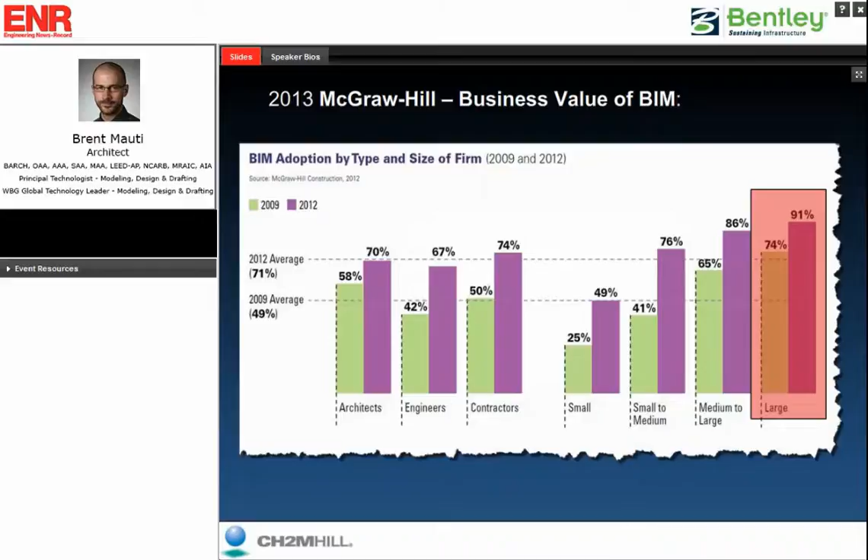Levels of BIM adoption, focusing just on North America, have steadily increased in the last 5 years. For us, CH2M Hill falls in the large bracket, and more companies are expressing themselves as being BIM-adopted companies with respect to use of the products and tools.

Focusing on the contractors and the owners, more and more of our supply chain, and especially our clients, are now requesting or mandating some type of BIM, whether it's BIM delivering us just models, or BIM where we want to leverage information for some type of downstream use. And that is continually growing and continually putting pressure on how we deliver.

Long-term benefits, I really like these: repeat business, reducing construction cost, reduced errors and omissions on documents in the short term, and reducing rework in the short term.

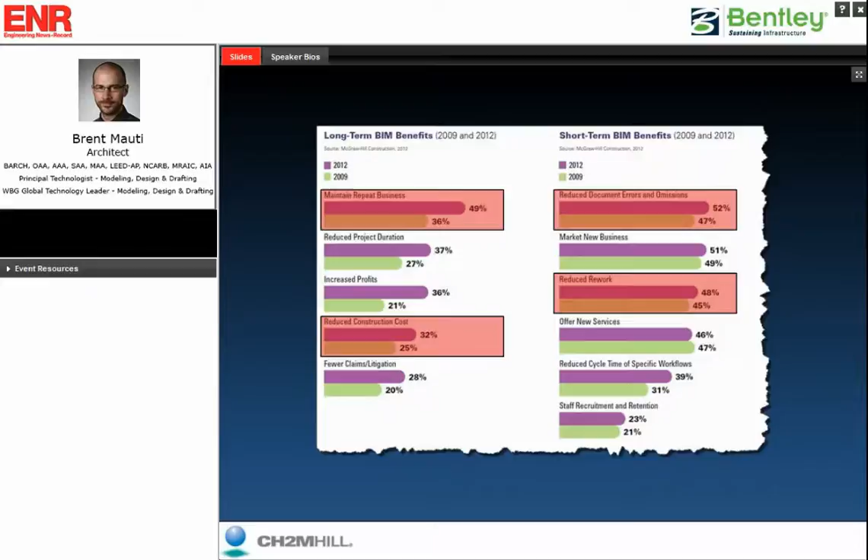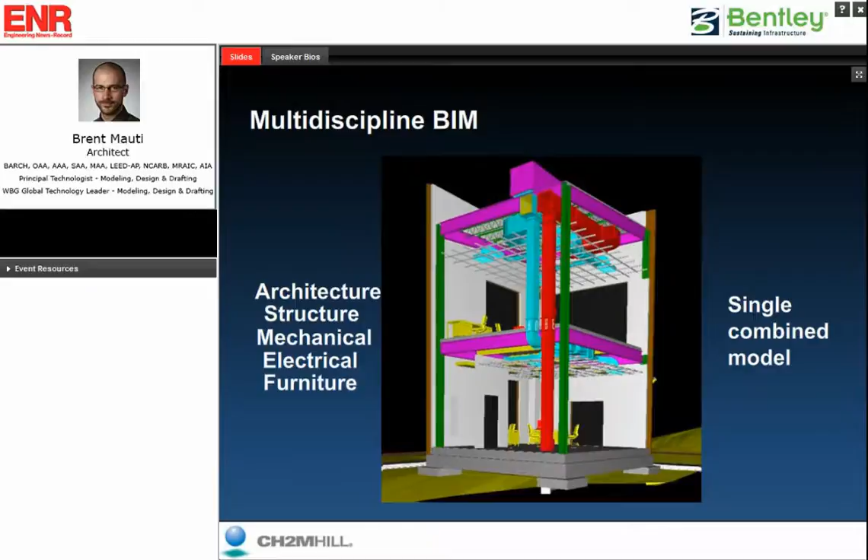So just laying that as a premise, CH2M Hill, as we apply BIM globally, BIM is really applied in a multidiscipline fashion. All of our design technologies are working and functioning in the same virtual space, developing models and information simultaneously. We have this quote, single combined model, which could be one central repository, a collection of federated models, etc. But BIM in a nutshell is geometry plus data put together.

Data can vary depending on the component, depending on the output, depending on the data needs. But when we deploy, as long as the components we model are known, as long as they know what they are, then everything is fundamentally BIM.

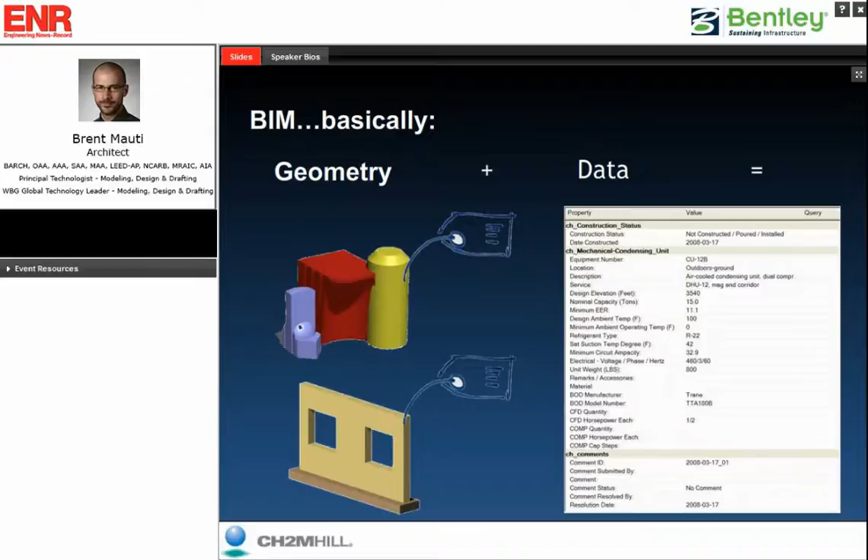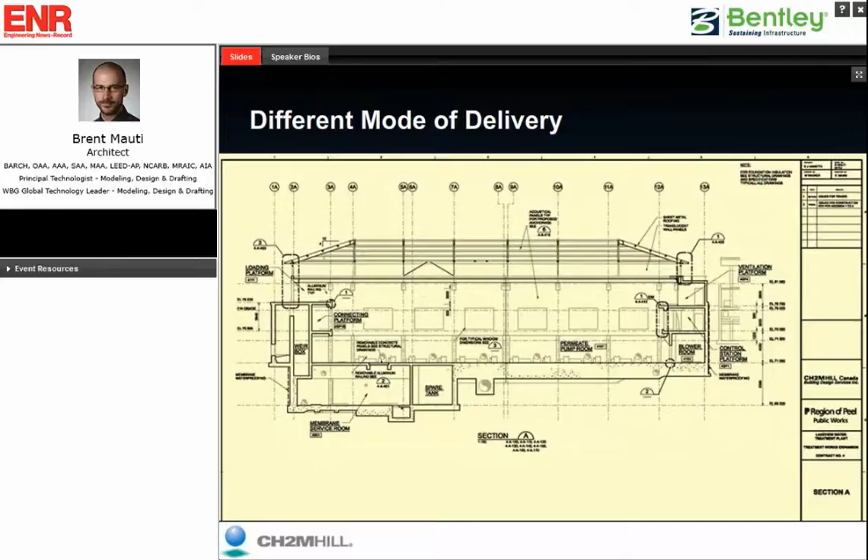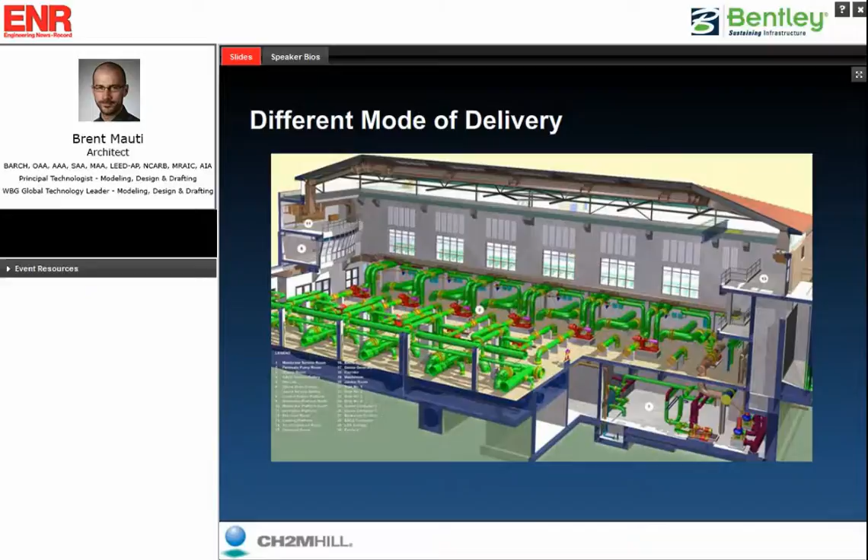And then we've migrated from 2D. When I initially started, BIM was in its infancy within the firm, but it was still being done on select projects. This was the mode of delivery, and this became this. This was one of my projects 10 years ago, and you can see the difference, the amount of information, the robustness of the visual acuity of what you're trying to portray versus that section.

We have several examples now where we can take our models that we've developed, go off to site, and do a compare and contrast. And I'm always amazed when I see the finished product being very close to what was within those design models. If the design models continue through construction, those as-built BIM models are pretty spot on.

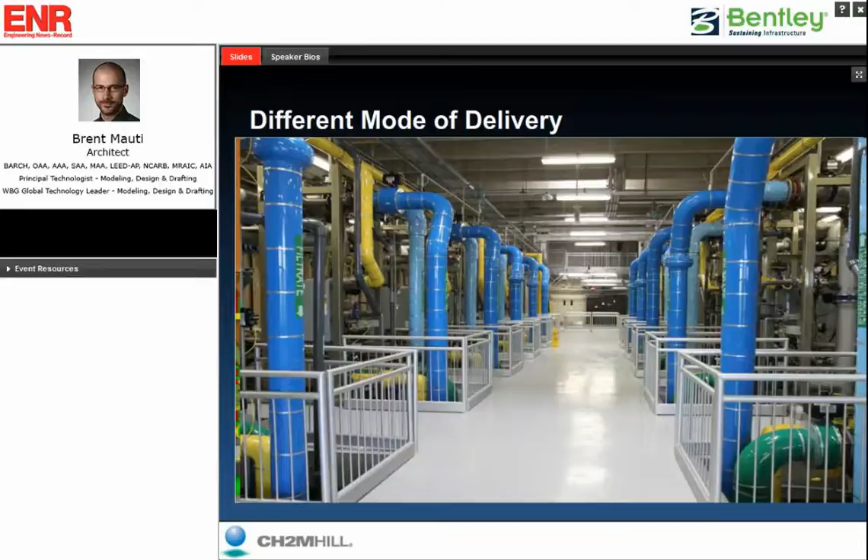The graph is the MacLeamy curve, seen in every type of BIM documentation, from conceptual through to construction. You can change things far easier in concept than during construction, and it's far more expensive to change during construction than during concept.

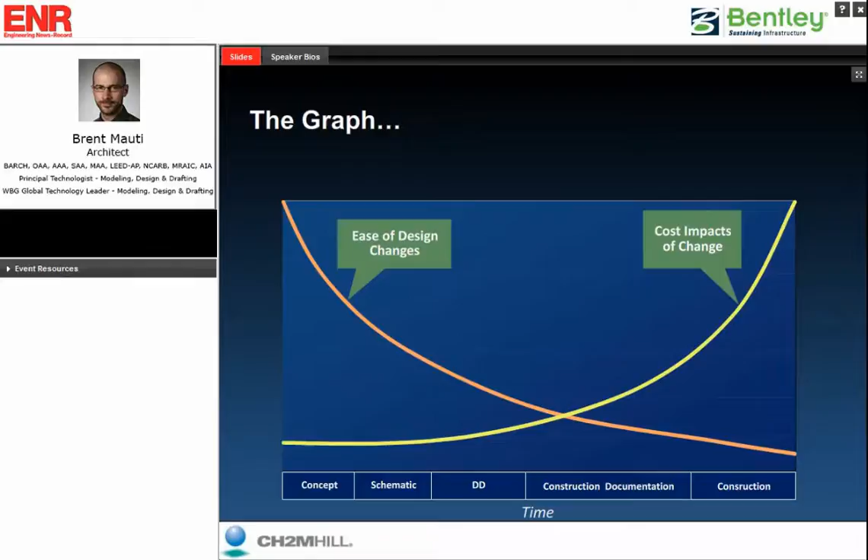We want to take that effort and push it so that the decisions made are robust and accurate as early in the project as possible. CH2M Hill has gone through a lot of efforts to define workflows, procedures, change management, and design checklists in order to help us be more diligent applying this conceptually.

It's always difficult not to want to go at the last minute and make those minor changes, wanting to erase stuff like we used to do on paper. All change can still be done, but it all has to be done in a coordinated manner.

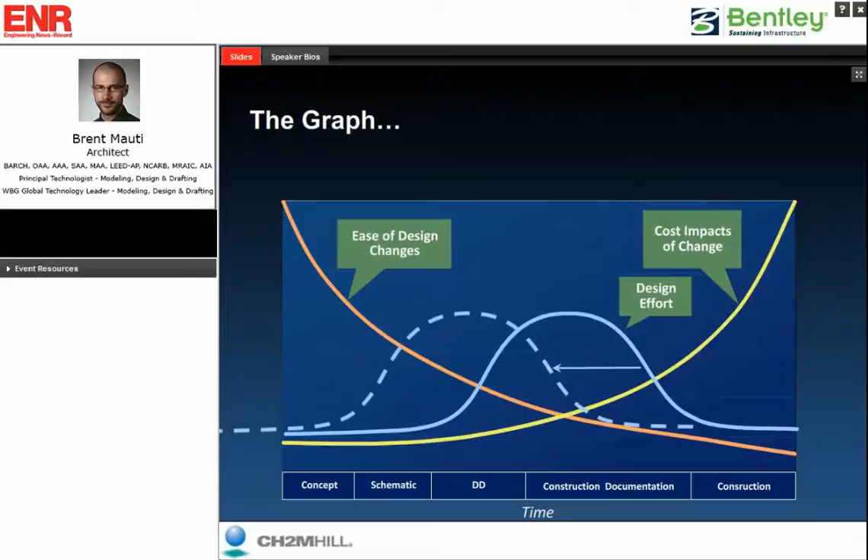So when I present BIM, I try to focus on what can you do and why. The model is the hub, the heart of BIM. Everything happens there, it's the single source of truth.

We use the Penn State BIM execution plan as a template for our project-specific execution plans. I like that plan because it defines the BIM goals. You select the goal you need to achieve on the project, either to achieve internal efficiencies, to meet client needs, or to better deliver, and you define your goals.

So when you look around the wheel of BIM, we have the ability to plug our model into analytical software, either provided by Bentley, if we're doing Bentley-based BIM, or provided by third-party vendors.

We visualize, so as simple as a print screen pasted in an email sent off to a stakeholder, here's your model, straight up to photorealistic visualizations and animations that take on setup time, production time, etc.

We are working on linkages to our specifications now through a tool called SpecWave, where we're actually able to potentially harness BIM information and take a first cut at editing specs based on the information harnessed from the model.

Design review and drawings and schedules are the fundamentals. That middle vertical stream is the de facto for CH2M Hill projects: we make a model, we walk through it and review it, and we make drawings and schedules.

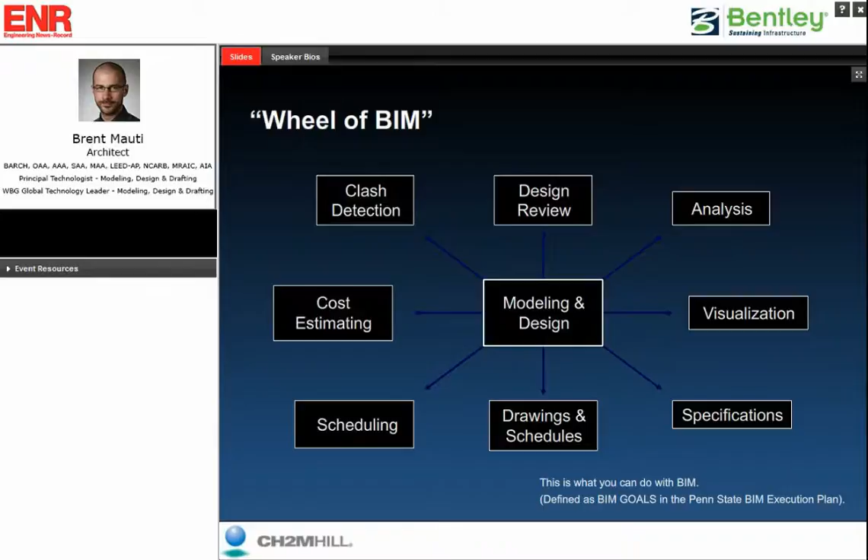To further extend it, I only have a couple here: fabrication and procurement specifically. Depending on what type of data is defined as important and carried through beyond the design lifecycle, we could take components like steel beams and send them to a fabricator to facilitate fabrication in their factory based on the data from the BIM.

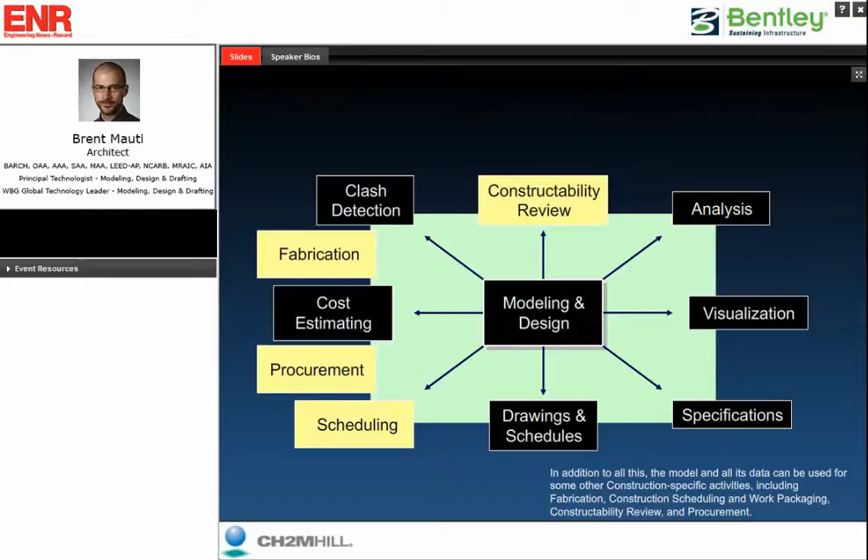We could take valves and pipes, for example, on a treatment plant and procure them en masse across multiple projects based on the data housed within. We recently have been tweaking this slide internally. You could have asset management, health and safety plans, etc. So there's a lot that can be done.

Now, we talk a lot about degrees of BIM internally. So do you have to do full BIM on every single project or not?

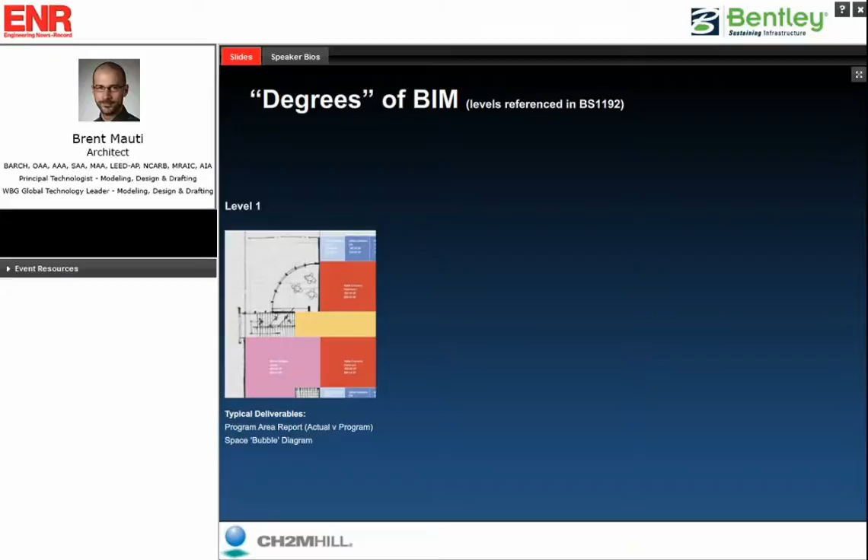We started with a level 1, which we describe internally as design-type charrettes, layout block diagrams using a tool like EcoSim. Those layouts carry intelligent room data information and can be pulled into a schedule and analyzed, and eventually can be automated into a level 2 type where you have one or more disciplines functioning in an intelligent modeling environment.

We have some projects where we have external subs who may do MEP in 2D, while we do architectural and structural in 3D, and we kind of make them jive.

The next level would be a multidiscipline full BIM model, but with limited information, so we're doing it really just for design review and drawings and schedules. Then there's the level that I call super BIM. Internally, we've been calling these levels 1, 2, 3, 4.

Recently, with the BS 1192 standard coming out of the UK, they called it level 0, 1, 2, 3 - similar type definitions. We're doing a lot of work in our UK offices to ensure we're able to satisfy these BS 1192 requirements and reach what they call a common BIM level 2 deployment, which in this vernacular would be what I'm calling level 3 full multidiscipline BIM. Now that's just focusing on design.

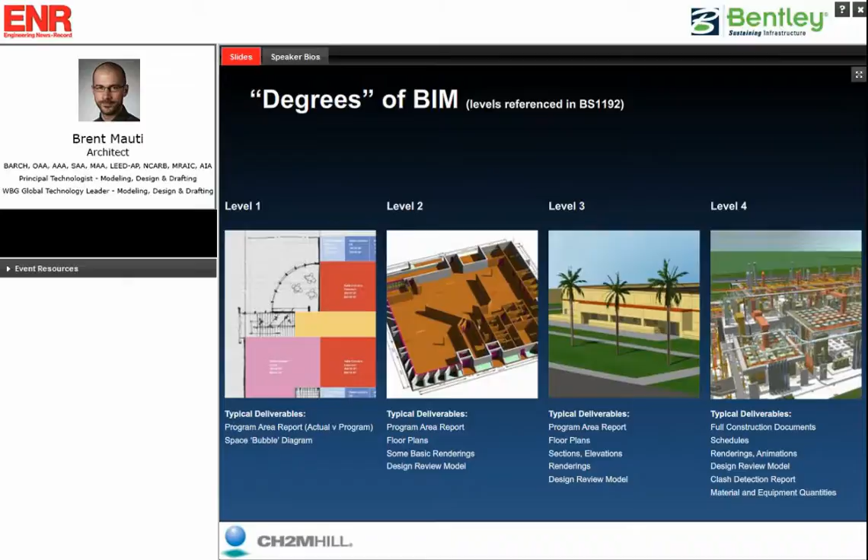The model continues into procurement and construction, and we can create work packages, construction phasing, staging payment plans, layouts, as-built models, etc. Holistically, it can go into operation and maintenance, so that same model can grow with respect to how much information is contained within it, leveraging owner-operator review, health and safety analysis, evacuation planning, and linkages to facility management systems.

And then beyond operations, if a building is to be decommissioned, we could know how much material needs to be recycled or disposed of. Or if a building is to be repurposed, we then have an as-built BIM model and an as-operated BIM model in order to plan the future life of that project.

Now I said look at it holistically because in reality, some components won't require anything additional than what's added to the model during design. For example, you could have a piece of furniture placed in the model so you can get a count of cubicles in an office building. When it's constructed, the information from the design model might be all that's required in construction.

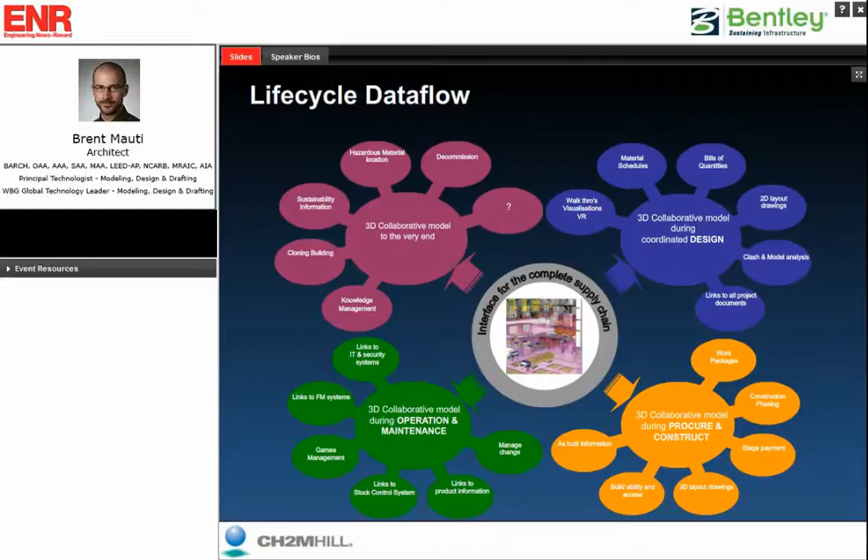Whereas other items, like the finish on the floor, might not carry as much prominence, and thus the data modeled during design might suffice. So define your asset of importance and track it throughout the lifecycle of the project.

We then looked at, well, how do we build these teams? CH2M Hill is a dispersed company with users all over the globe. Now some BIM software focus on what's called a centralized database. That's doable, but this graphic is trying to depict that depending on where you are in the world, you'll have a different connection to that centralized database, and thus the perception might be, well, BIM doesn't work because it takes forever to move a component.

So we take the federated approach where it's like sending puzzle pieces across the globe. We each own and author our specific federated portion of the model, and we have a glue that allows us to share these components across. There are times when we have to utilize both a centralized database and a set of federated models simultaneously, and we plan that through our BIM execution plan. I'll come back to the glue that pulls it all together in just a moment.

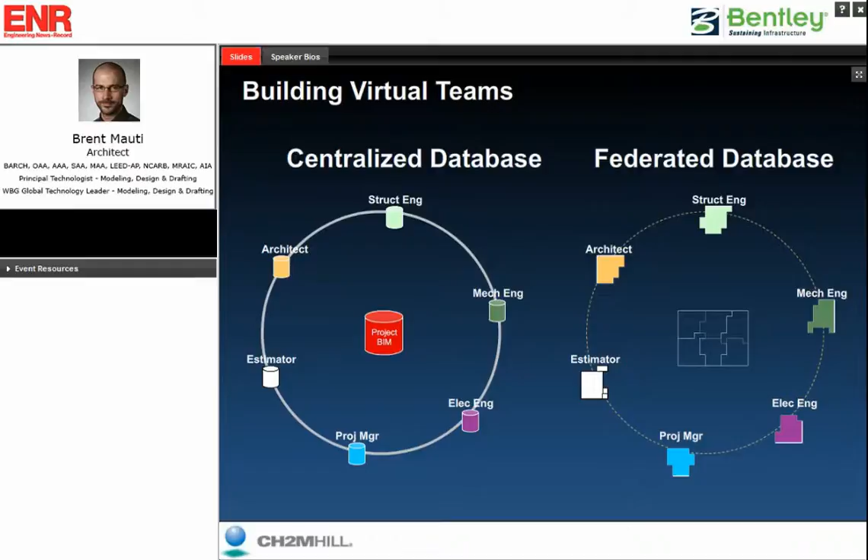So then finally, when we look at metadata management, we start to look at, well, BIM is divided, in our view, into three focus areas: building, civil, and plant. So what are we modeling - is it a building component, a civil, or a plant component? What is it? What tool am I going to be using?

So how am I modeling it? What type of space does it take up? If I specify three types of vendors, are there three different potential sizes? How do I account for that? Depending on whether I'm building civil or plant, I will select a specific tool, and that tool will drive certain required data to be placed in the model.

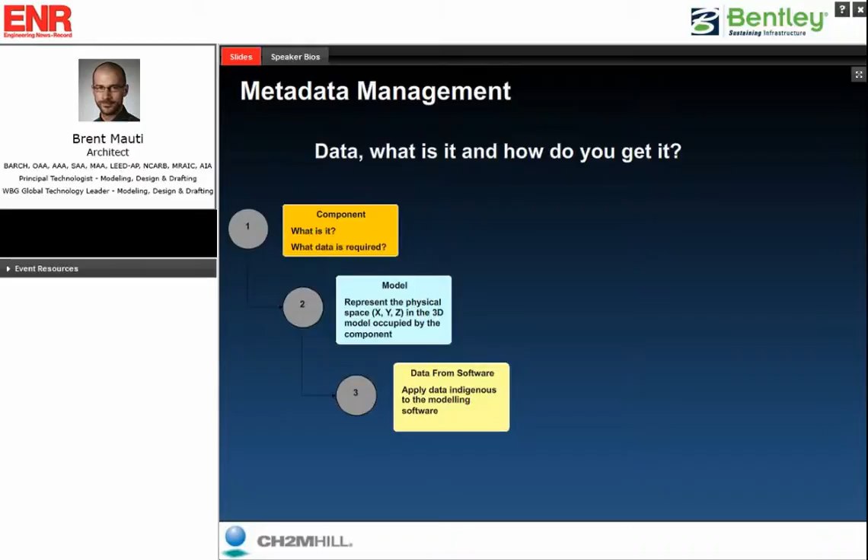So using AECOsim Building Designer, if I want to place a wall, first I have to say place wall, so the tool knows it's a wall. Then I have to enter some particulars about the wall before I can even place it. So I'm already forced to fill out information. And then what type of unique information or unique identifiers are required?

So if I'm doing a door, being an architect, I'm very familiar with that. I place the door - is the door fire rated? I'm going to give it a door number. What type of hardware - am I using a hardware type, or hardware specific, like closers, hinges, locks, etc.? I can start to build that information while I'm selecting and placing the component.

So in the world of Bentley, you list your type of component, and depending on what you're modeling, it will drive us to a specific BIM authoring software.

We select the representation of it, and I always like to say, don't dwell on the frivolous. Over the years when we try to do design review, if you're modeling the door hinge or the buttons on a control panel, it bogs down the model with frivolous information that doesn't help the depiction of the tool, the procurement of the component, or anything beyond.

What data comes from the software? Parts and families are in the building, we've got flow streams, service identifications on the plant side, etc. What do you have to place, and what uniqueness can you add in lieu of that? You ask the question for each and every component as you're modeling, and once our users became familiar with that, it became second nature. They know that if they're going to model a column, there's components and metadata to select in order to place the column in the model.

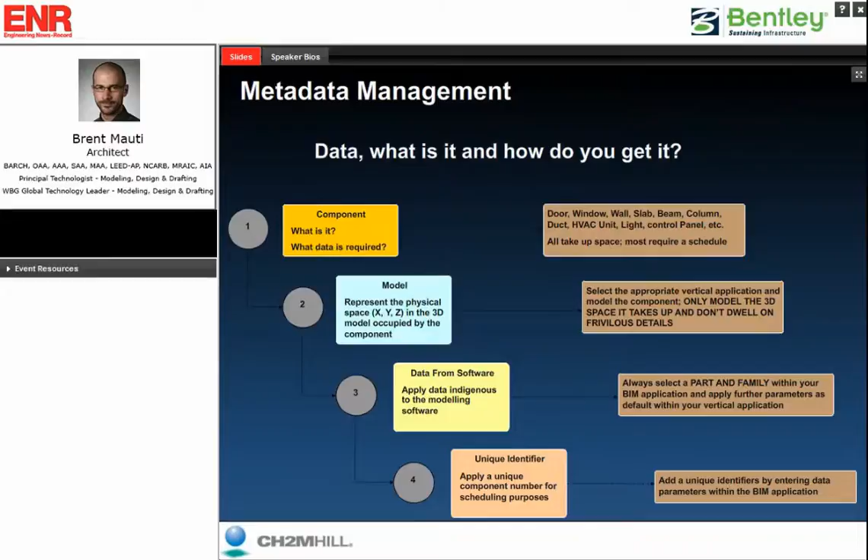So we'll talk about the glue that connects us together. ProjectWise is our document management and content management system. It enables us to create content in the BIM authoring software. We have to manage the content, deploy it globally, deliver to the right audience in the right form, and ensure it is correct, accurate, and current. We want to preserve what we've built so we can reuse and quality check, and as standards and content change over time, we're able to revisit, re-review, re-quality check, and continue to reuse, all while collaborating so we can share and work share across the globe, leveraging our expertise anywhere.

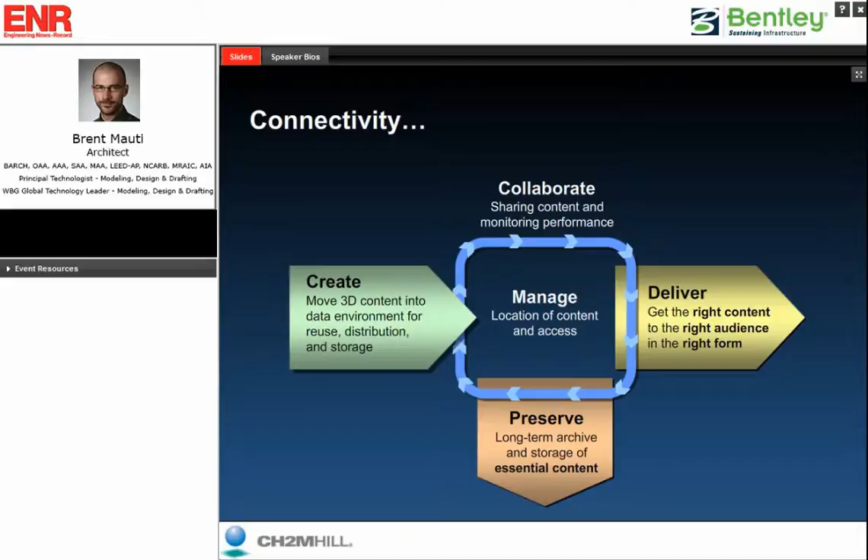For those who haven't seen ProjectWise, we've got full connectivity via a desktop application, and there's also a SharePoint application with a lighter version, a lighter ability to connect. In SharePoint, we tell our stakeholders that you can access this environment to review static production, so PDFs, iModels, etc. But to author content, you want to use the real ProjectWise environment, and we'll talk a bit about that here.

So if anybody's thinking, well what exactly is ProjectWise, why are you guys using it? I like describing it as just a bunch of servers scattered across the globe. At CH2M Hill, our architecture of the system has a corporate data center housed for us within Denver and London, and from that corporate data center internally we cache to local offices. We have a data center server, a bunch of servers in a local office, information moves to and from those offices. Then through the gateway server, we're able to connect external entities who have their own ProjectWise infrastructure, or external entities just connecting via laptop.

The biggest benefit about ProjectWise is it brings us this delta file transfer. As we're sharing information all across the globe, we send the entire file the first time and then just the changes the next time. So our corporate data center is like a puppet master, and all the other pieces around are like puppets, pulling the strings, ensuring synchronization all across the globe and ensuring that the most accurate bits and bytes have been transferred to and from every single user that touches a portion of a project.

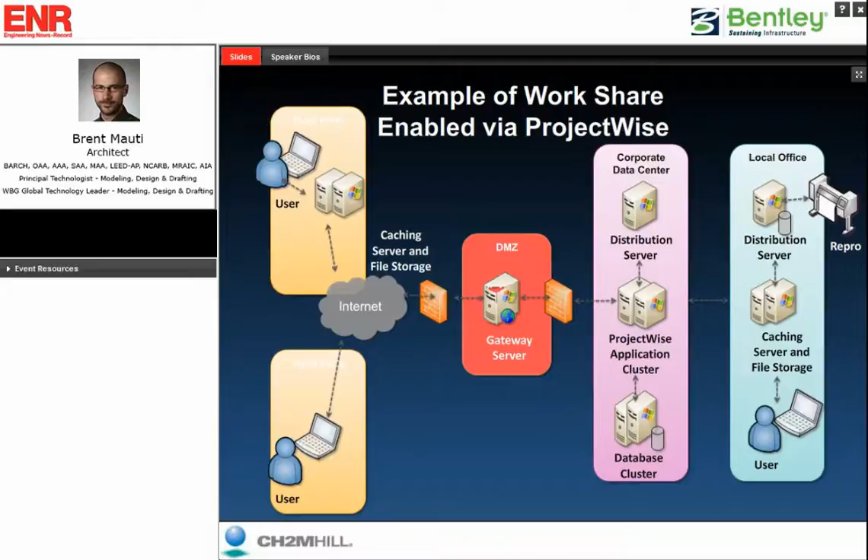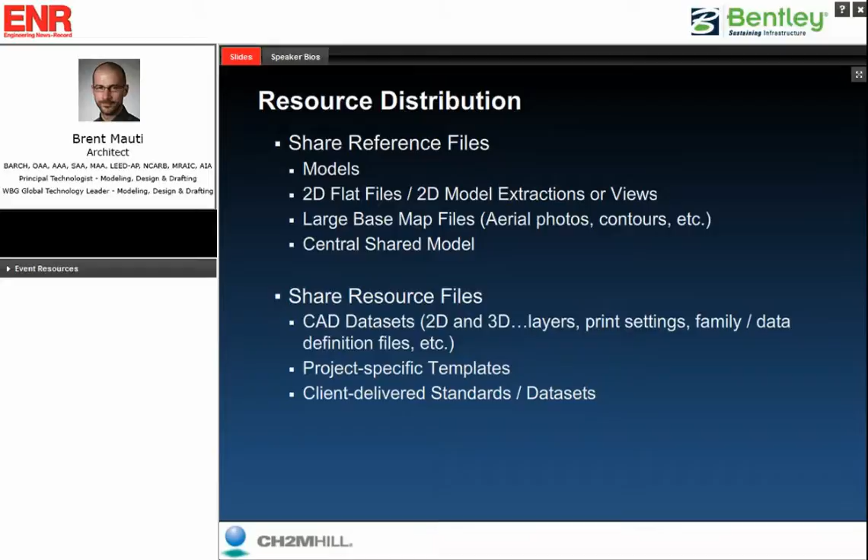With ProjectWise, we have a very heavy focus on resource distribution. Using Delta file transfer and caching, it will grab all the models, flat files, base map files, and shared central models for Revit, locally cache that content on my machine, bits and bytes. We also share what we call our resource files or data sets - a robust CAD data set for AutoCAD and MicroStation to bring complete interoperability across platforms, plus data sets for building, civil, and plant that we globally deploy using a tool called ProjectWise Resource Manager, which we developed internally as an add-on to ProjectWise.

So this workflow: access the collaboration system being ProjectWise, check out a file, locally cache your references and/or update them. Then for us, this tool kicks in - the first time you check out a file, we throw you some compressed content, maybe up to 10 or 15 zip or cab files containing the data sets for platform, building, civil, and plant. Open your content, author it, and check it back in.

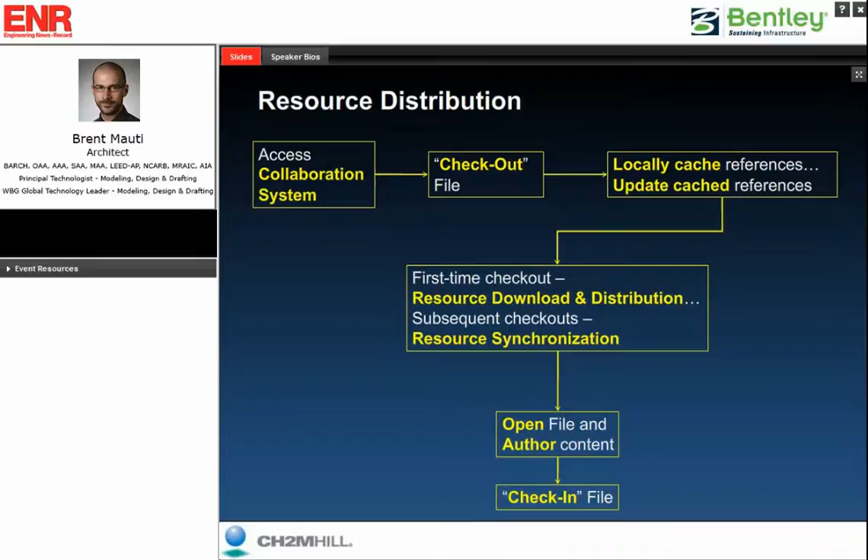The way that works is we have this synchronization perpetually occurring, still leveraging Delta file transfer, but we have a set of compressed resources - for OpenPlant, PlantSpace, base MicroStation, base AutoCAD, AECOsim, the various Bentley building versions, etc. When a user accesses the system, just those compressed files get locally cached to the user's system, and then once cached, it gets deployed.

So when we go through this process, the deployment of the resource using AECOsim, for example, our data set has about 4,000 files. So instead of locally caching 4,000 files out of ProjectWise every time I open and update a file, it'll locally cache my one AECOsim compressed resource. When it verifies I have the most current resource, then I'm good. If I need an update, it will bring me the change and then locally deploy it to my machine.

Our workspaces and project configuration files will all reference these deployed locations, and ProjectWise Resource Manager ensures the content expanded to our C drives is the most current synchronized content with what's being deployed from ProjectWise. Also, since it is C drive based, we have complete flexibility to extend this to anybody outside of the CH2M Hill environment because there is no dependency on our networks or servers.

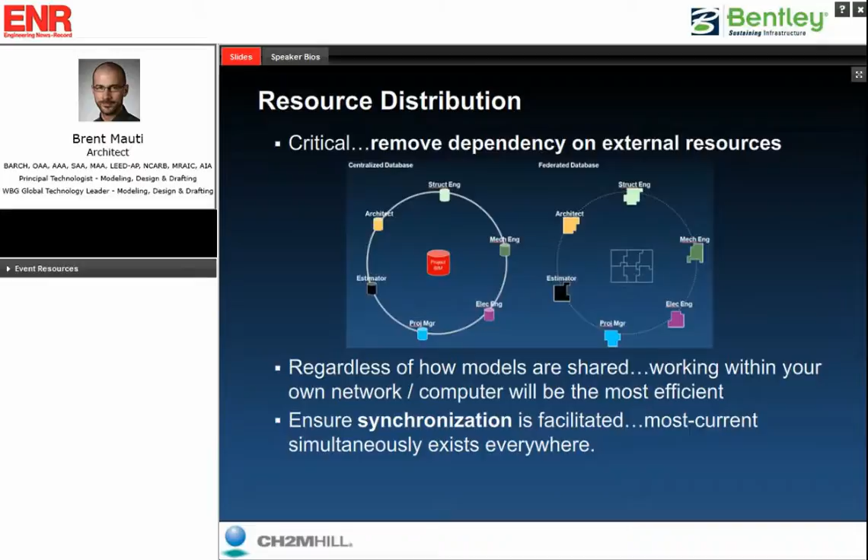So that's critical - moving the dependency away from external resources. We're sharing models, whether it's the centralized database or the federated approach. The more we can enable users to open content, unplug their system and work, that means they're working locally on their C drive and connecting and moving content to and from ProjectWise. Synchronization is facilitated so the most current version is always on the machine when content is launched, prior to someone being disconnected. So my example there is I'll go on a plane, and I can work on my model because I pulled the content down from ProjectWise before getting on the plane.

So we want to remove the need for connection to our networks or various secured cloud services by allowing access through our cloud, which is our ProjectWise infrastructure - grab the content, work, and then send it back. This enables us to work with externals, not only for Bentley data sets, but also when we're converting to AutoCAD and have to deploy AutoCAD profiles. This synchronization we've enabled through ProjectWise has allowed us to utilize one configuration, which is C drive based, thus extendable to anybody sitting across the globe.

So I'm going to talk a bit about the BIM tools now, and I have a couple diagrams that I'll walk through here, to show kind of the whole picture together. So we'll start again with the glue - ProjectWise is our hub. As we develop these BIM solutions, we look to develop them using ProjectWise as our foundation to enable collaboration.

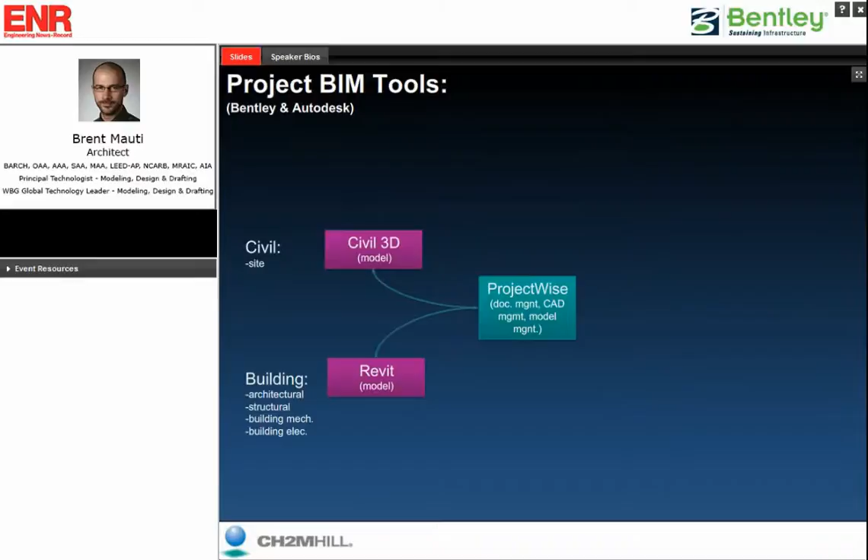From an Autodesk standpoint, we've had projects where Civil 3D is a requirement, as well as Revit, with AutoCAD as our deliverable and MicroStation on the back end.

What we're having here is Revit using the iModel plugin can get us an i.dgn file in ProjectWise to use in our Bentley-based plant delivery.

ProjectWise has enabled us to place the Civil 3D data shortcuts from Civil 3D into ProjectWise as well. So ProjectWise is now managing the central model of Revit, the data shortcut projects of Civil 3D, and providing a medium to get Autodesk BIM-authored content into the world of Bentley.

But just to make things a little more complicated, we have our deliverables. From the AutoCAD perspective, we can grow our Bentley plant solution because that's where we have our most robustness. But we have Autodesk projects now asking, can you use Intergraph's CADWorx, or new Plant 3D, Revit MEP? And I didn't even put in Bentley AutoPlant. So the AutoCAD-based solutions from a plant perspective, there's many of them.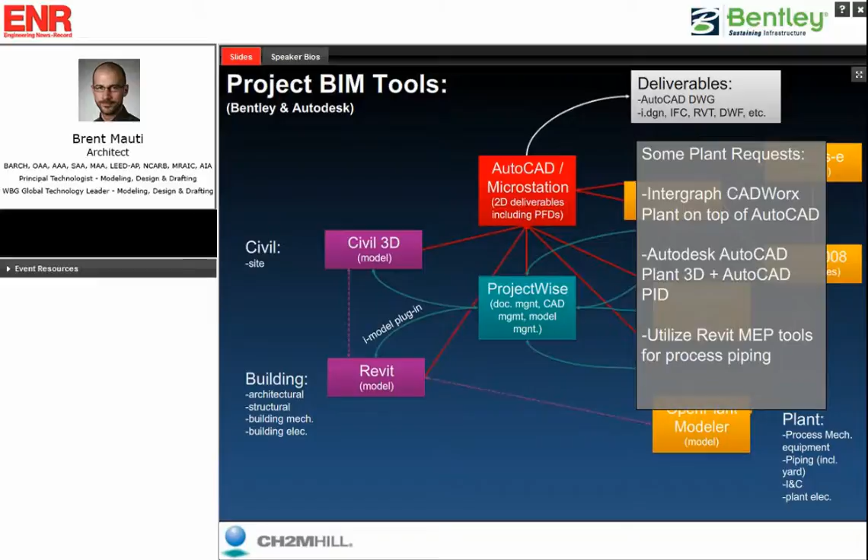ProjectWise has allowed us to say, let's take whichever one we have to utilize, but we can still manage content and build teams through the ProjectWise interface. And then finally, looking at Bentley, if I have this whole Bentley solution I described 3 slides ago, we then have others.

So we have projects where SolidWorks comes into play. A vendor or supplier says, we only build our unique mechanical component using SolidWorks, or Autodesk Inventor, AutoCAD Inventor. These are unique tools that don't integrate with ProjectWise, but we want to manage the authorship of the content, especially version control, and track it specifically to meet the UK's BS 1192.

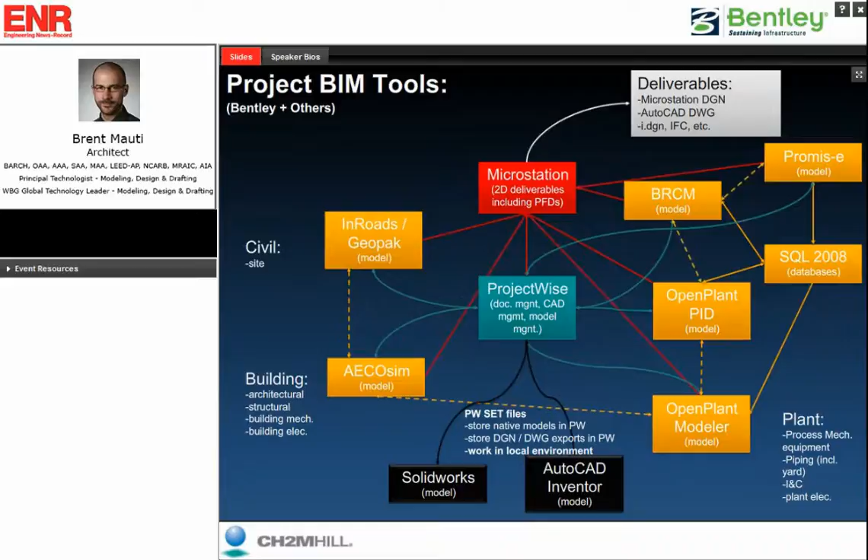So to do that, ProjectWise has the ability to make link set files. What we'll do is store the native content in ProjectWise, use the link set to extract the collection or composition of components and files required to utilize those types of tools, work offline to author them, and then send that set file back into ProjectWise. This lets us maintain interoperability and authorship of the content, sharing the outputs from those tools across the rest of our environment.

So ProjectWise being the glue for all those various BIM tools, internally at CH2M Hill we've looked and said, well, we've got to go from large to small offices and deploy this content. ProjectWise let us look at this and say, we have delivery centers, large centers, small centers, project offices, etc. They might vary from 1 person to 10 people to 200 people to 500 people. It doesn't matter, ProjectWise lets us enable work share from any one of these places.

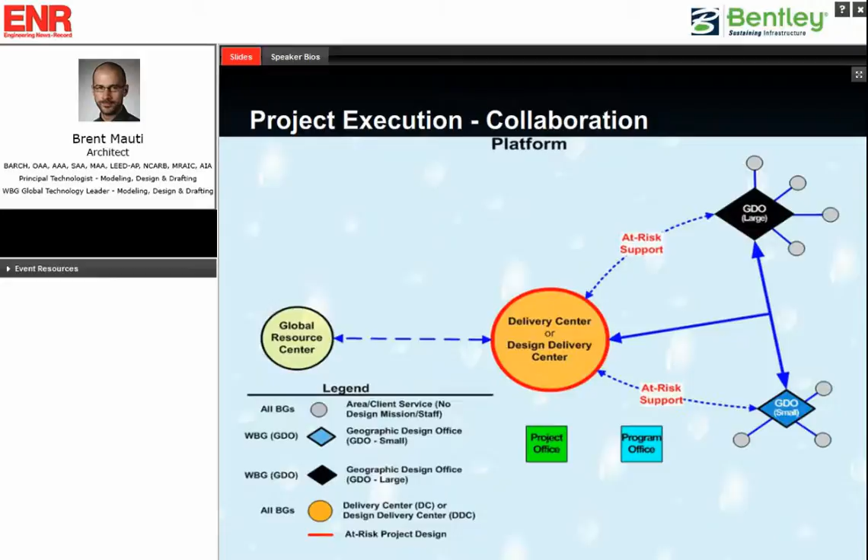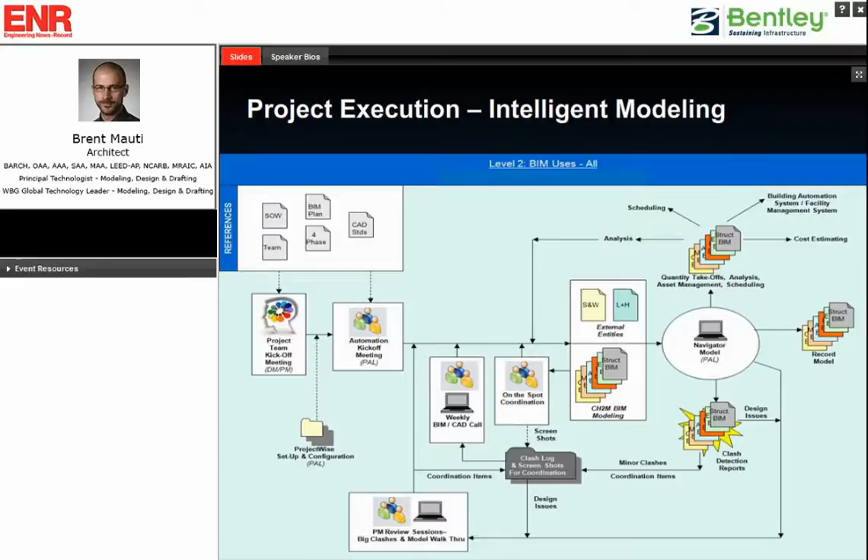So that all happens, then we develop this CH2M Hill model here. Whatever the tool, the collection of BIM authoring tools, the content gets authored, gets modeled, gets reviewed by what we call a PAL, Project Automation Lead. This is showing Navigator, it could be Navisworks, could be something else. We review, we clash detect, we go through this cycle to and from the team, back into the models, back into the review, continue that circle until finally we're at a point of delivery, and we can deliver quantities, takeoffs, drawings, schedules, stuff to asset management, etc. Or we can finally have our as-built, our record, our as-operated, etc. So we go through that entire process for each project.

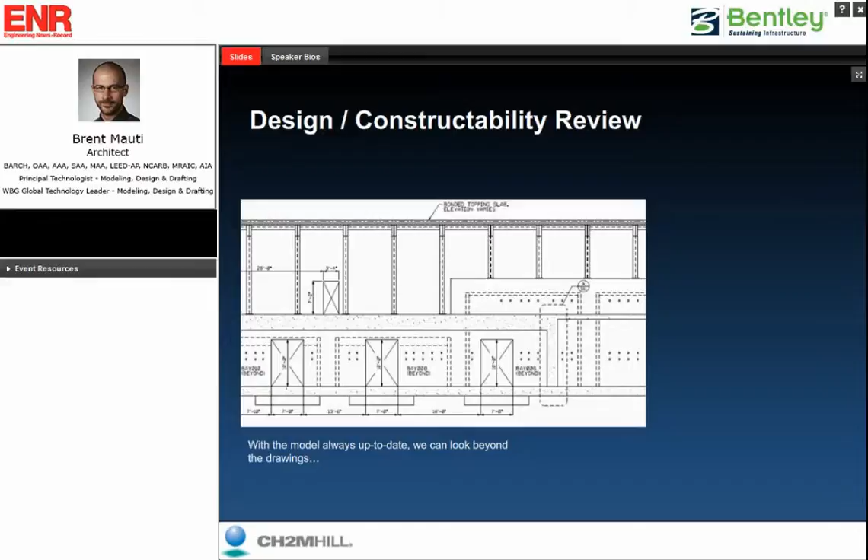So very quickly, design constructability review, some of the benefits BIM brings us. We're able to look at this and say, instead of trying to interpret that drawing, we'll look at the space, we will collect the models, look at the space as a whole, understand how the components go together, can it be built, is that the right stage to build content, analyze that accordingly.

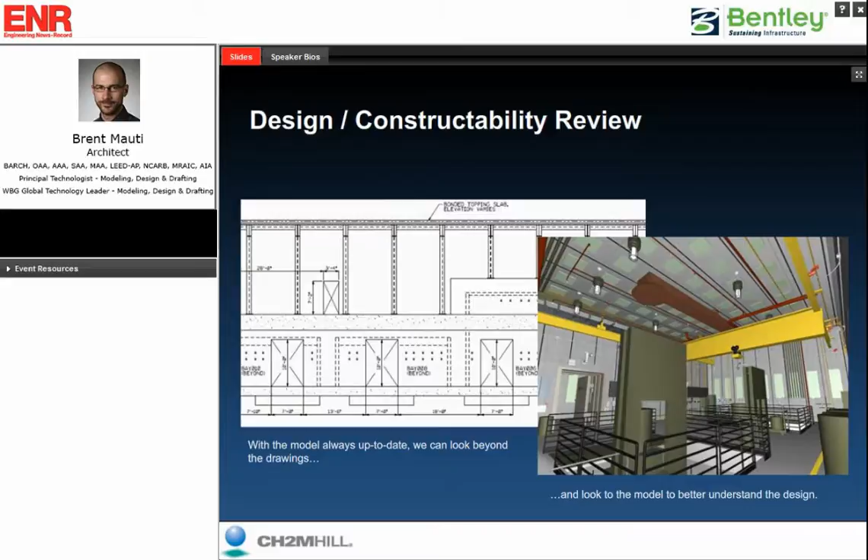We can clash detect, so Navigator is awesome at this, right? Press a couple buttons, reference A to reference B, level X to level Y, process, a couple seconds later it starts showing me all of these clashes—where are things touching other things. There's some pretty good suppression rules, and you can get a good report from what's new, what's been addressed, what's still existing, and you can mitigate this. This Excel report, you can pass that around to design managers, but the interactive reporting, to get a team on a quick live meet, cycle through these clashes and say, look, some of these are maybe okay, but you know what, beam going through door, you got to fix that, right?

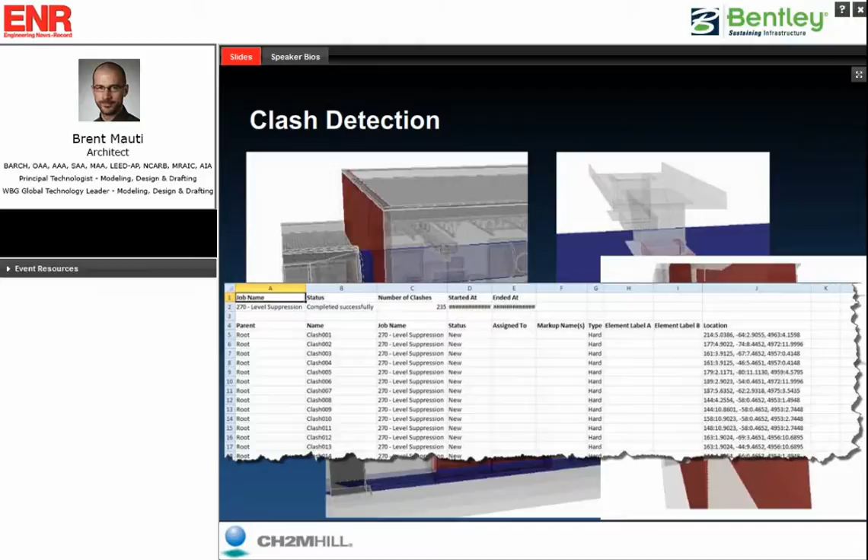That's just not acceptable. We can simulate construction, so we have a project where we've tried to schedule the content.

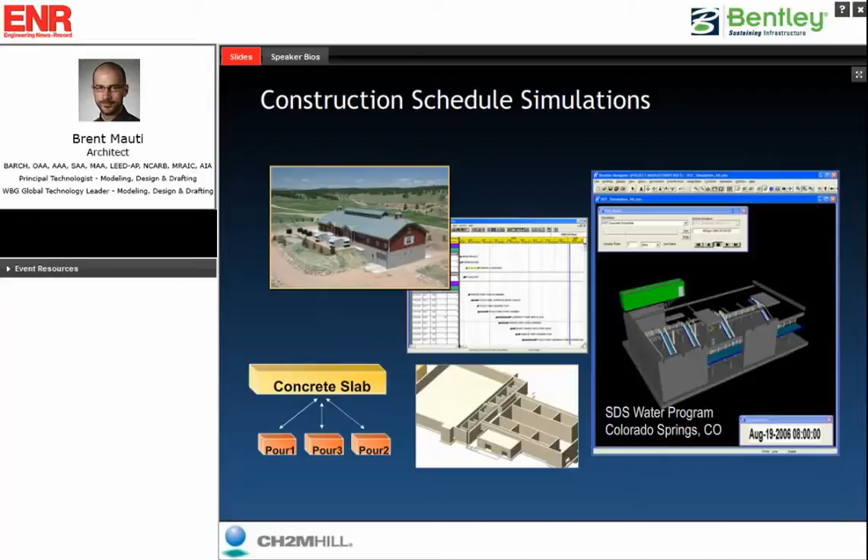When we're looking to do schedule simulations, what we stress with our modelers is be cognizant of how you model, or else we cannot schedule. This little diagram, the concrete slab into the 3 pours, I like showing on these presentations because it gets that message across. If I want to show the concrete's going to show up in 3 pours, I can't model it as one component. Another example, we have a 5-story building. You can't model the steel column 5 stories high - it can never get to site, and that's not how it'll be built. So as long as modelers are thinking model as it should be constructed, take educated assumptions during design, refine during construction, you've got something pretty robust.

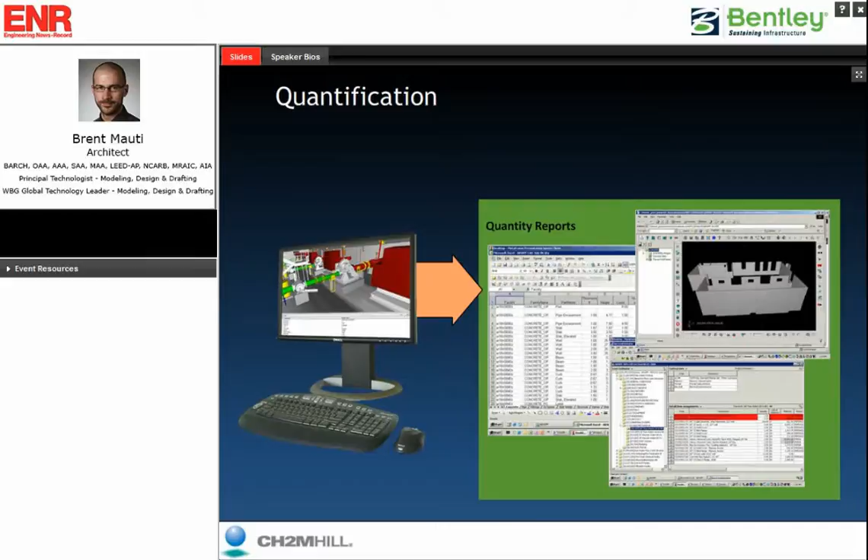Quantification, a couple of clicks of a button and we get reports, whether it's in the building, civil, or plant tools. I'll cycle through this, but this is an example of a concrete report from our building model. We have a robust list of parts and families that our estimators want us to divide the content, so we've set data group catalogs based on what were initially just parts. Hit a couple buttons and the content can be estimated for us.

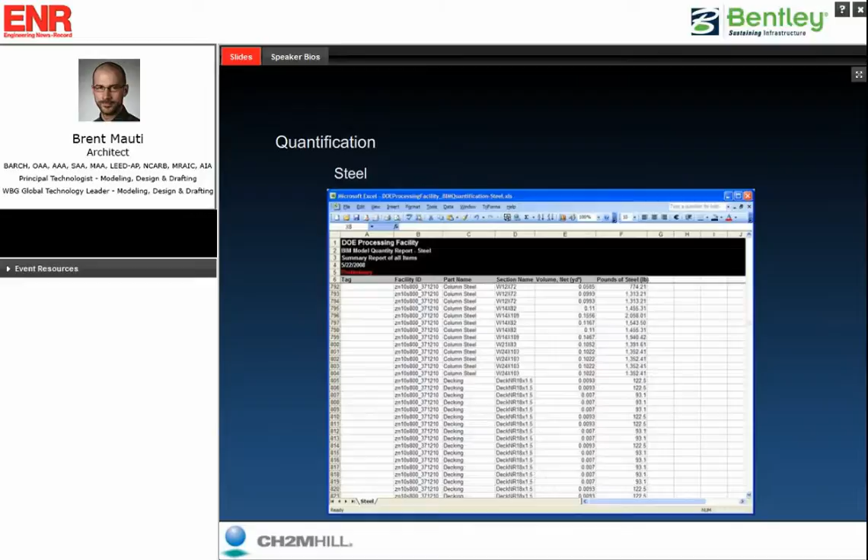Same with the steel, this is just going through various sets. You can see all the types of steel that exist within any given project or model. We can get full reports of those, we can isolate them by steel type, or just show everything in its entirety.

Energy analysis, we've attempted to use AECOsim Energy Simulator to pull a GBXML export of our building model into Simulator and run some simulations. We also use some third party tools where we try to pull content out. This is more of a work in progress for energy.

Structural, we've been playing with some AECOsim to STAAD/RAM using the ISM as the convert medium. So we have some engineers that gravitate to that. Others, sometimes that's a bit of a barrier, and they'll just say, you do your model, we'll do our analysis, we'll make sure the two jive.

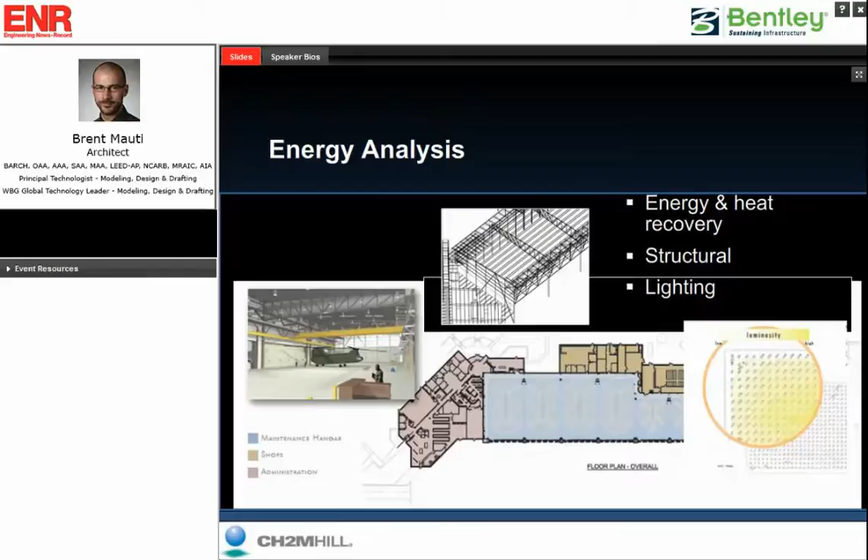In closing, I want to talk a little bit about leveraging data for the last couple of slides, and then we'll open up to questions. So, as I said, the quantity...

It's not just quantification, but now with AECOsim, this was kind of revolutionary for us. AECOsim brings the ability to quantify absolutely anything, and that's what's huge for us - everything has data group as a backbone. Thus, I place it in the model and I can quantify it, complete with areas too. So areas net, so I can do the form work, and areas gross, and then also net, so I can do the finishes if there's holes cut within the slabs.

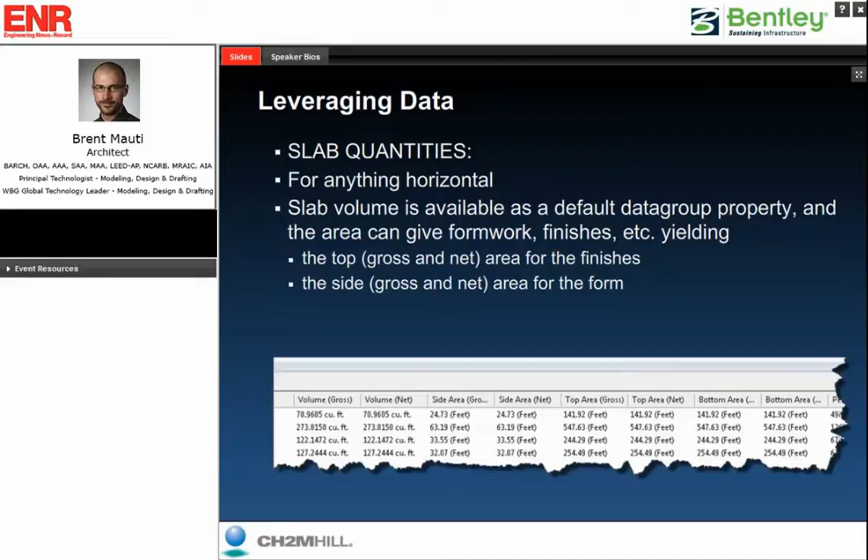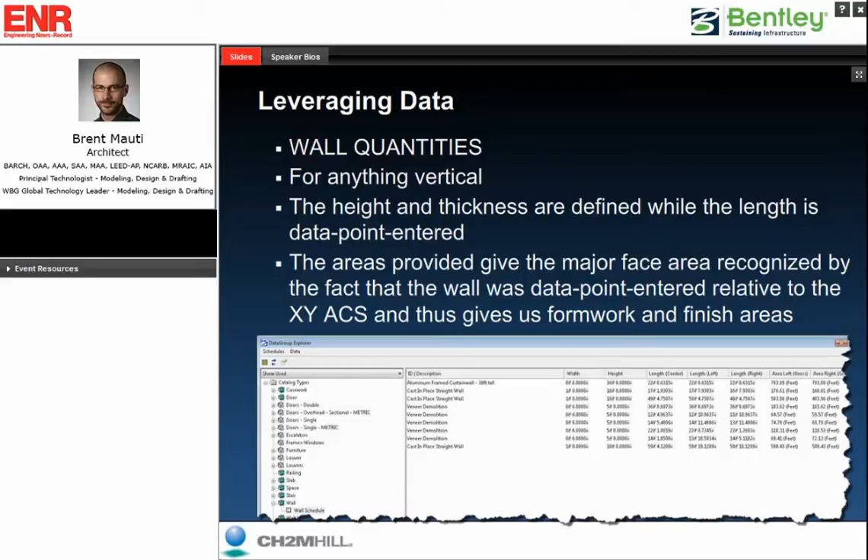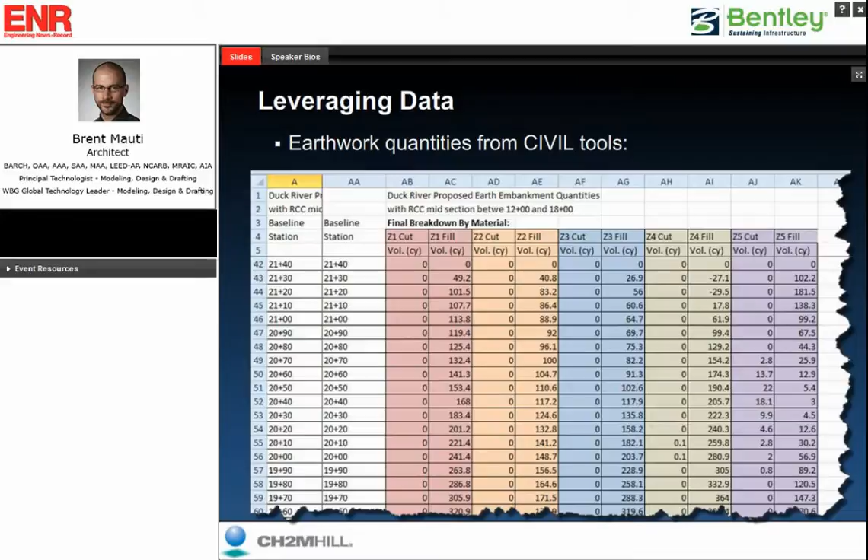Same with the walls or anything vertical. We built our data group catalog so that we have a robust set of data definitions in the wall, and thus we're able to quantify any vertical component, understanding volumes, areas, both gross and net. From the civil side, InRoads, GEOPAK, and MX have various abilities to leverage the data housed within the DTM, pull it out, query it, understand it, and this is just showing a cut-fill quantity from our earthwork as an example.

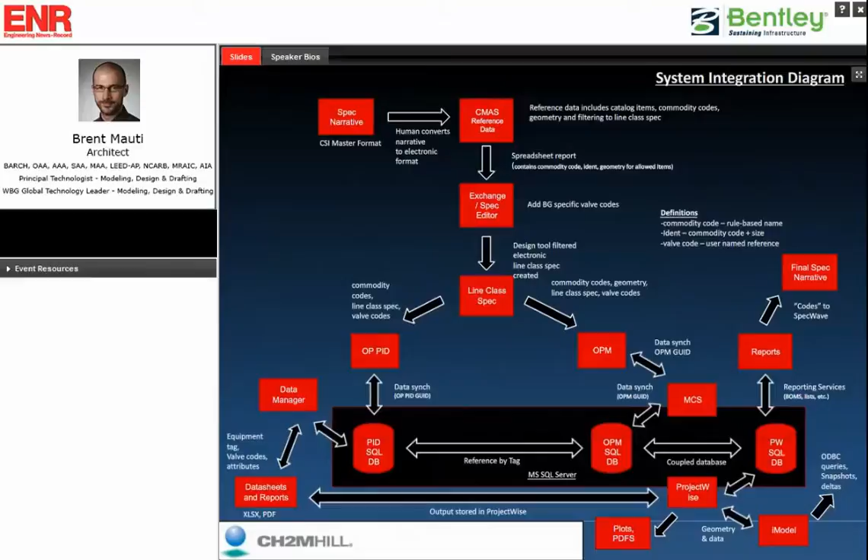Now finally, I want to talk a bit about what we're doing with plant, and this is quite the diagram here, so I'll go through it step by step. We're basically using what we call our CH2M Hill Material Management System, which is our procurement system, to house our spec narratives, or what we're calling our line class specs. So we're building the ability to understand all the components on a plant model that we would want to model, design, procure, and deliver. This tool also gives us a neutral format that we can then feed potentially Open Plant, Auto Plant, Smart Plant, and eventually CADWorx as well. So regardless of how many vendors are at play here, we're working from one common data backbone.

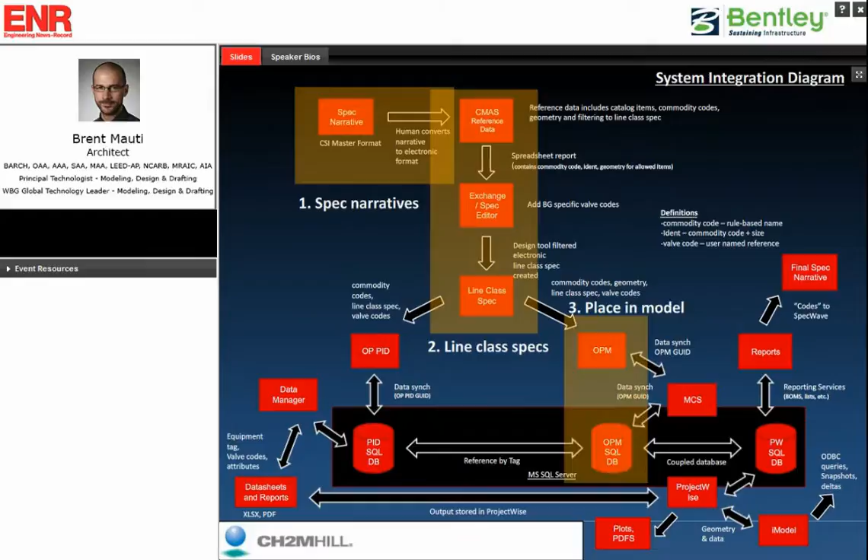We then develop this line class spec based on the components and content housed within our system. We model the component, we'll be able to model it in Open Plant Modeler. In parallel, we have, in theory, initially built the intelligent P&ID, and we have consistency reporting across Open Plant P&ID and Open Plant Modeler. We're then able, through the MCS, to connect to ProjectWise, produce final spec narratives and reports based on the content housed within the system, and deliver information, whether it's drawings, PDFs, iModels, etc. Now, the iModels are unique for us because that opened up a whole new world of what we can do.

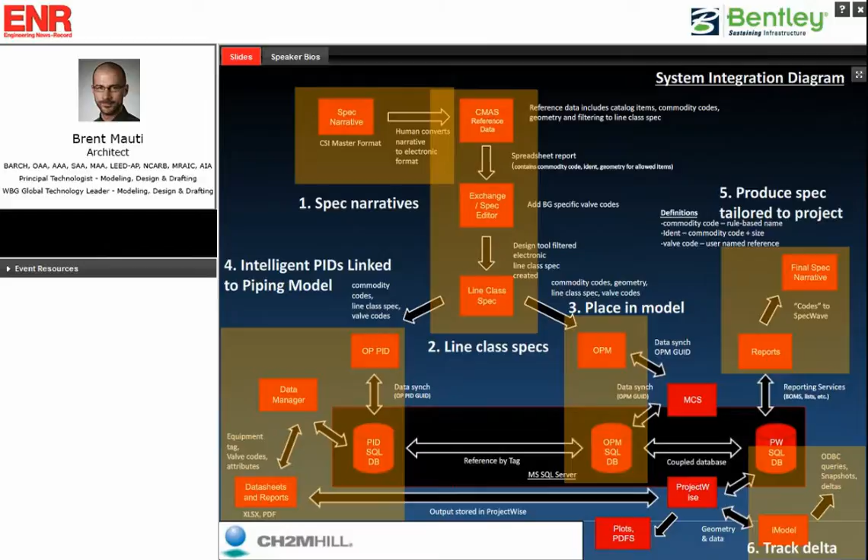Notice here I have in small letters: ODBC queries, snapshots, deltas. This is a big thing for us internally, especially on design build projects. We want to be able to take two iModels at any given point in time and track the change. We have a tool where we query the iModel, since it's available for query within our Windows environment, and look at what was in iModel number one at date X versus what's in iModel number two five days later. We can then analyze the thickness of the pipe, the additional reducer, and assess that change. Does it have an impact? Is it fit for purpose? Did it increase cost of our project? We can look at that at any moment as we're producing iModels using ProjectWise's iModel generator.

That's the other thing as well. With ProjectWise as the backbone, iModels and PDFs are being generated server-side. So we check in a model to ProjectWise, we get an iModel generated automatically, thus facilitating the ability to do Delta reports.

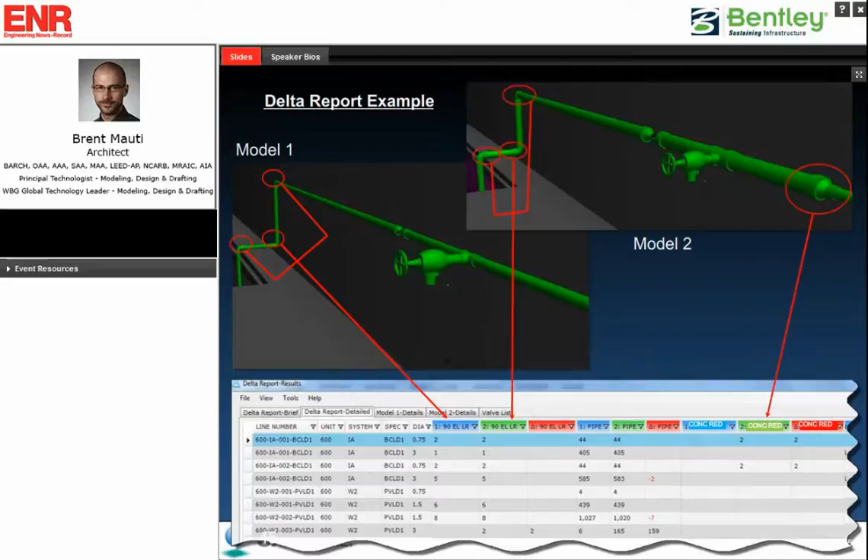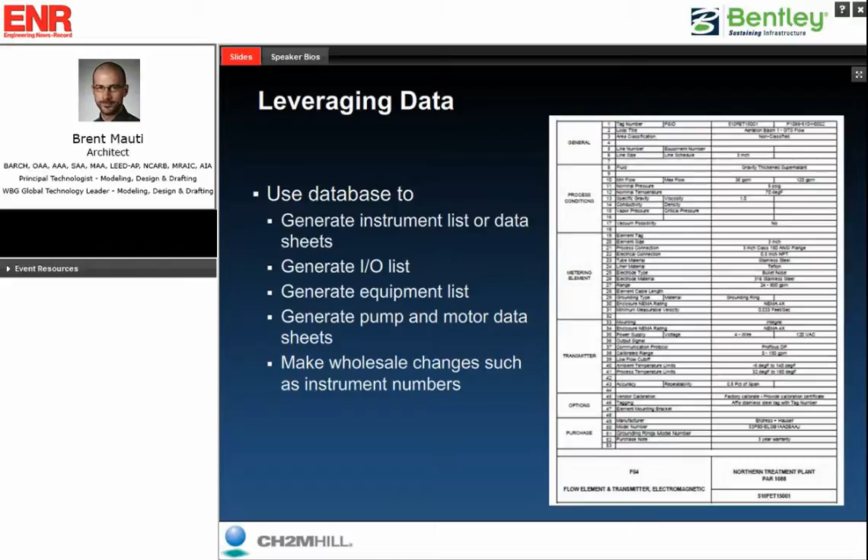From our plant information, we take that data and fill out data sheets using our data manager. We've built customized data sheets within data manager to generate equipment lists, motor data sheets, etc., leveraging information in the P&IDs so we're not duplicating info.

Finally, when you're managing data flow, consider the information—I mentioned an asset of importance. What are we looking to track and why? Who's creating the data? Who owns the data? What software owns the data? Who are the stakeholders?

When you think of the data flow, this is an internal slide I won't go through in detail, but the idea is project definition through to post design development. We look at what disciplines come in first—P&IDs and process, when looking at a plant, are first out of the box, defining the component and everything, integrating that information into mechanical, civil, and building disciplines. We flow that information along the life cycle. Those P&IDs hit 100% while we're starting to get a more robust model going forward.

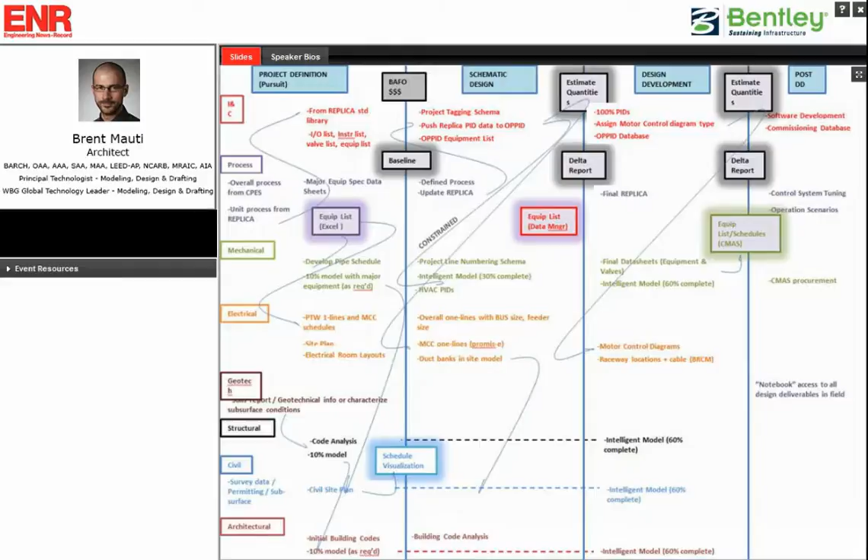Finally, key benefits based on everything I've described. I know that was a lot in 40 minutes.

Global work sharing—deliver from anywhere in the globe, internal or external to CH. We connect the team, which is very important for us.

Multiple platform BIM deployment. Our plant solution is very robust in the world of Bentley. We have other business sectors in CH2M Hill using Intergraph, and at the end of the day we have clients that say give me some Revit, give me some AutoCAD. ProjectWise glues all of that together for us and empowers WorkShare.

We're able to leverage data through a life cycle—we define an asset of importance and focus on it, and we're able to deliver that. We visualize, and we're more efficient because we're updating components once and leveraging it on any of our output deliverables.

Change orders have been reduced. So when I'm asked what's the tangible benefit for a BIM project when we go into construction, that is proving to be it—and it's in all the BIM literature—but we are seeing that when everything jives in the model, it jives on site. Change orders are reduced.

And we're improving the quality. We're seeing changes and understanding the ramifications of changes even later in design, how it impacts other disciplines and quantities to estimators, like quantity of concrete. We're confident giving that to our estimators because we're confident in how it's being modeled in our BIM authoring tools. With that, I think we can open up to questions.

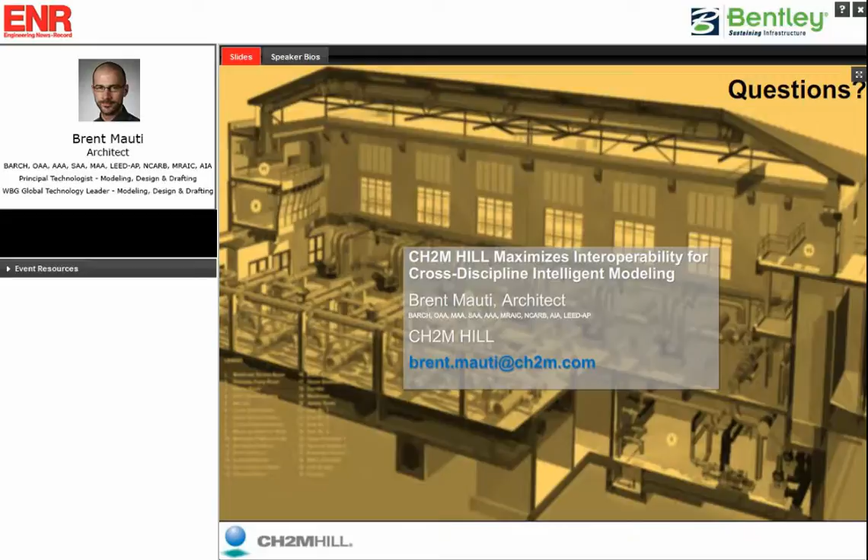Let's pick a question that I think is a thread I'm seeing through a number of the questions, and that cuts to this question of ROI. Owners are obviously looking for return on investment, and so are the users of these technologies. Can you maybe quantify and expound on the ROI we're seeing from the use of these modeling techniques?

Yeah, well, quantify is always difficult, but definitely I can expand. Owners have expressed gratitude in that they're able to understand what we're designing from the very beginning.

So the design review sessions become far more robust because during 30, 60, and 90 percent stages, we're able to actually show them what's happening, with 30% drawings, there's not much to understand. So visualization is key to meaningful design review.

We're able to understand from an owner's perspective what their assets of importance are. On a water treatment plant, they'll give us particulars about their asset management system, and we can ensure data linkages or data threads from design and construction models into operations. Their information is input once and understood, potentially linked to from the review model. Plant operators are very appreciative of walking through the models, especially while designs are under development and into construction.